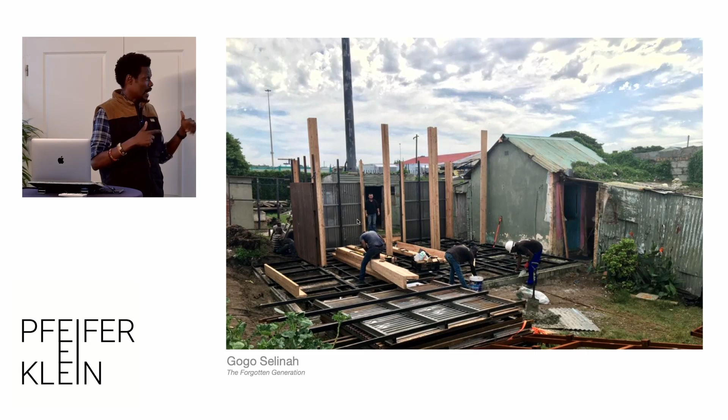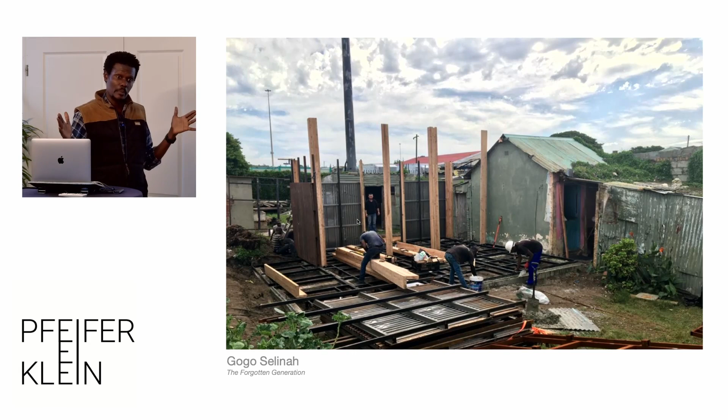But what we did is we recycled those. We took all the wooden members within them and created new beams and columns. So we laminated them, which is what you're seeing there. Then we took the skin of the collapsible shipping container and used it on the outside. We also took the OSB boards and used them on the inside.

Freight containers usually have foam inside them to control the cooling. Port Elizabeth is an industrial city, so it has a lot of these freight vehicles transporting fruit, food and all that. So we took that foam, cut it up, and insulated this house.

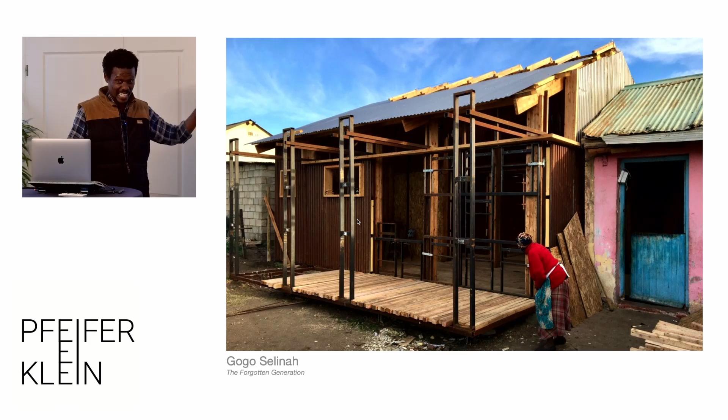So this is us working. By the way, this was during COVID, in the middle of COVID, so we only allowed 5 people maximum on site. We had to create the building, prefabricate it, and then bring it to site, making sure that the old lady didn't get COVID. So it was just madness.

And this is one of those nights we just pushed the project. We wanted to get the project completed. So what we did is we restored the old structure. Actually, let me play a video of it just to show you what it looks like.

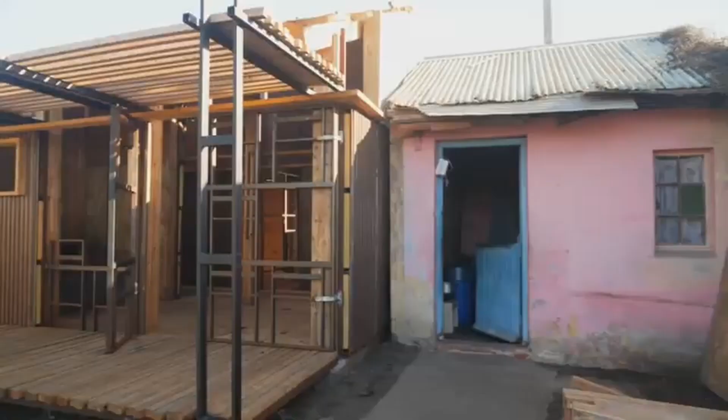So here we are at Selinah's site. On my left, you see the old house. This is where she's lived her entire life, basically. She moved here around the 50s or 60s. And behind me is the new structure that we're building now.

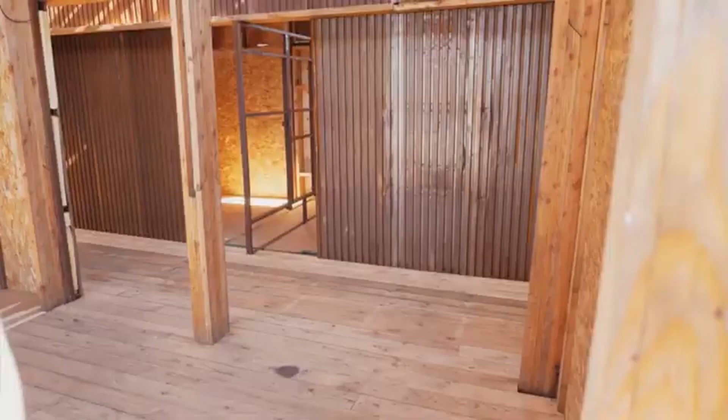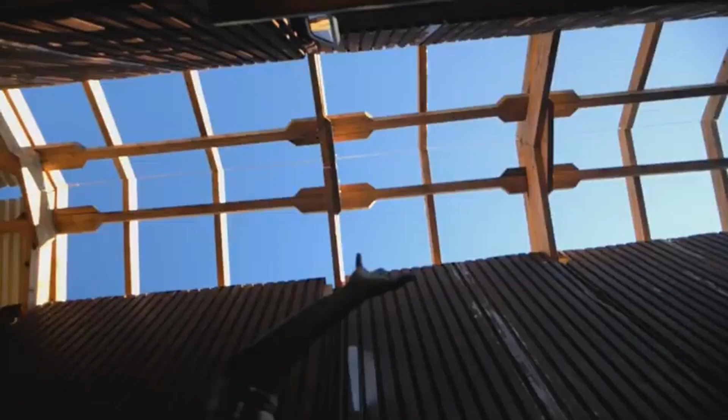So this here is actually the dining area, with a bit of a kitchen on this side, and then looking out, the balcony and veranda. A very interesting feature of this house is the atrium, because the design is meant to be passive, using natural lighting and very little energy. The carbon footprint is meant to be as small as possible.

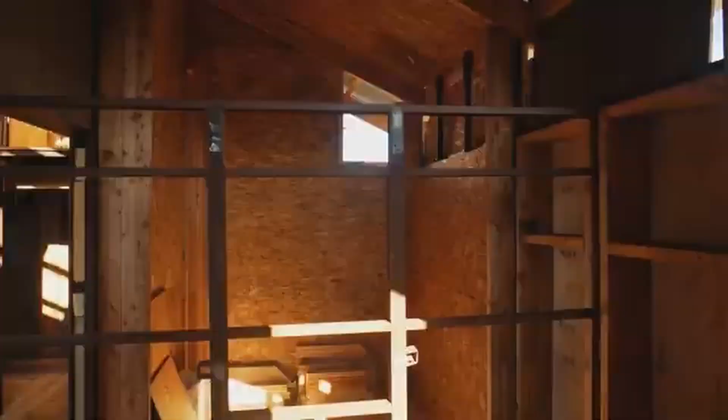We're going to cut a big door here into the existing structure so that you can move from the lounge through the corridor into the living area, into the kitchen on that side. And then these here are the 2 bedrooms for Selinah and the granddaughter.

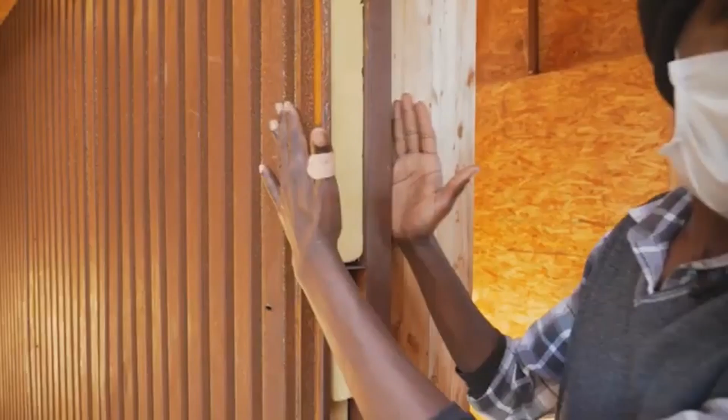So this is one of the secrets of this house: it is very well insulated. You can see the thermal insulation held in between the sheets and wood. So this area is very special.

It's actually Selina's granddaughter's study area, elevated high up, a bit of a quiet space. Underneath it is where the bathroom, shower, and wash basin will be. There's a nice big window on that section.

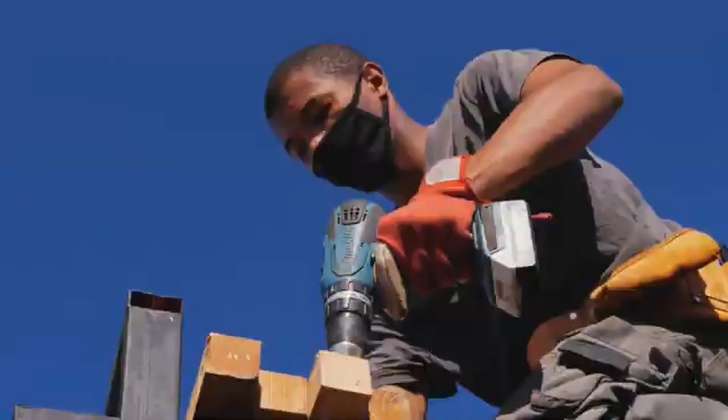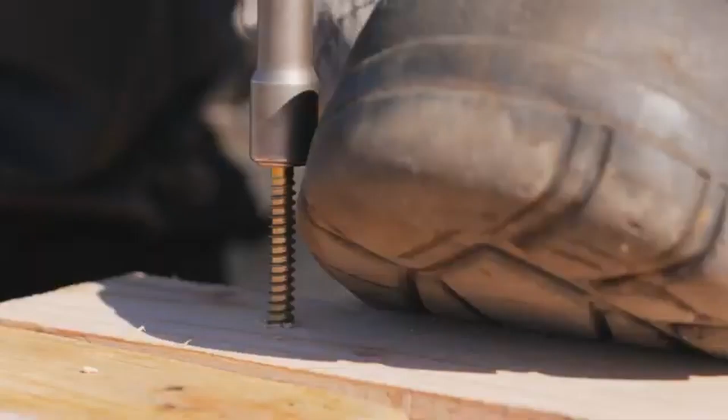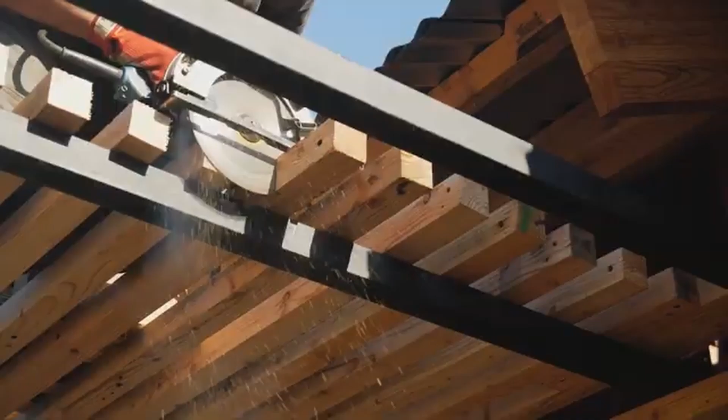It took Kevin and Sitlibo 4 months to build the new house and then another 12 months to complete the inspirational project. What you're seeing behind is finally a result of all the effort that many people have put into creating it.

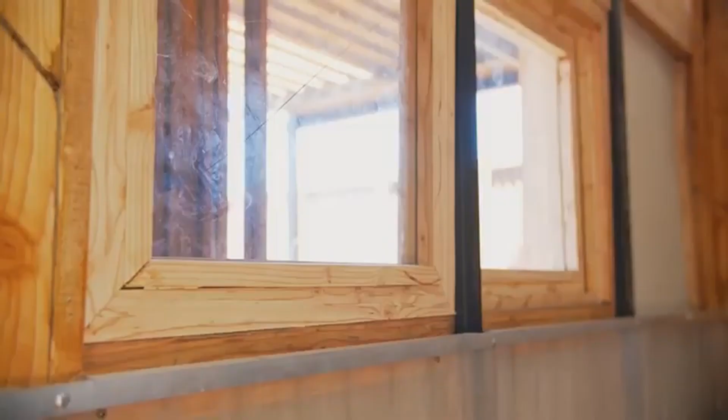So this is the dining area of the house. As you can see, it opens up to the north, and behind me is the kitchen, which is actually quite simple, made up of chipboard and recycled wood. It's an open plan layout, simply because that's what we could afford.

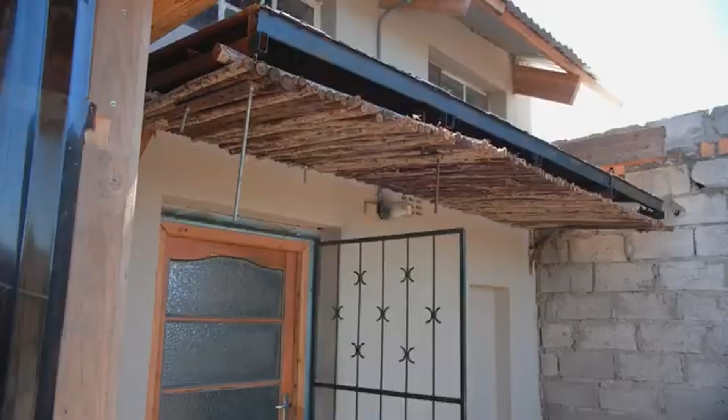Then we come to the living room. The lounge is actually the original part of this house. This is where the ceiling was collapsing, and what we did here is raise the house higher so there was a double volume, which means the house is much cooler. We retained the fireplace behind me. The couch you're seeing here is also made out of cassettes, which is very interesting because it's quite comfortable, 3 chairs to make a sofa, also from recycled material.

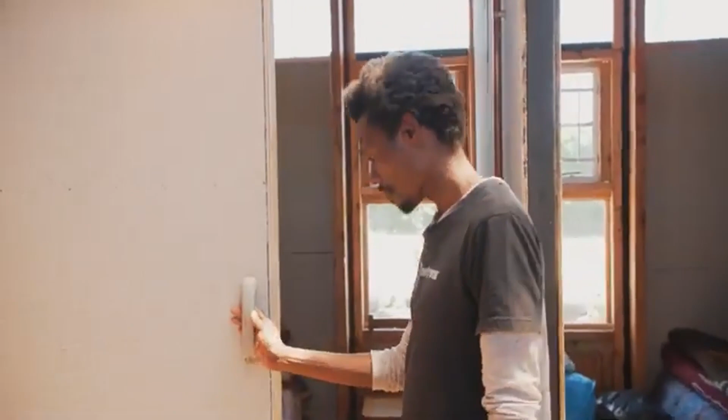This is Gogo Selina's bedroom, and this is Michelle's bedroom. The two bedrooms are actually identical. They consist of a single bed and a whole wardrobe section, which is also made up of recycled material from metal and wood.

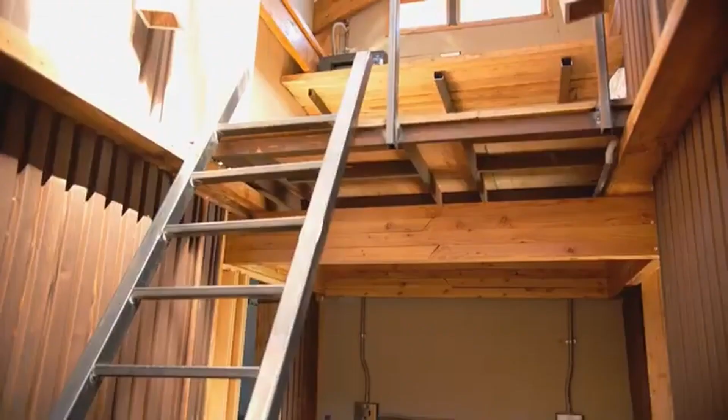Behind me is Michelle's study area. It's a special space. You have to go up through a cat ladder, and on top is a small space which provides maximum privacy and good space, just mentally, for Michelle to be able to concentrate on her studies.

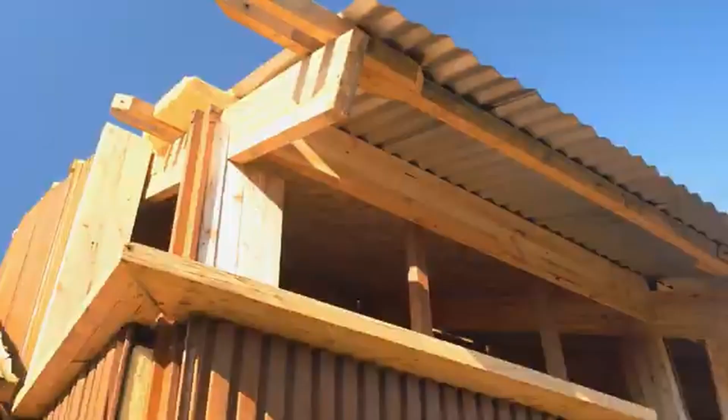Michelle is an amazing young woman who's currently in matric and has a great love for theatre. She has been able to grow up fast and is a protector for her grandmother.

I love my study room, and I love the fact that it is upstairs, so I would see Gogo when she's calling me, and I would hear her and run downstairs to help her.

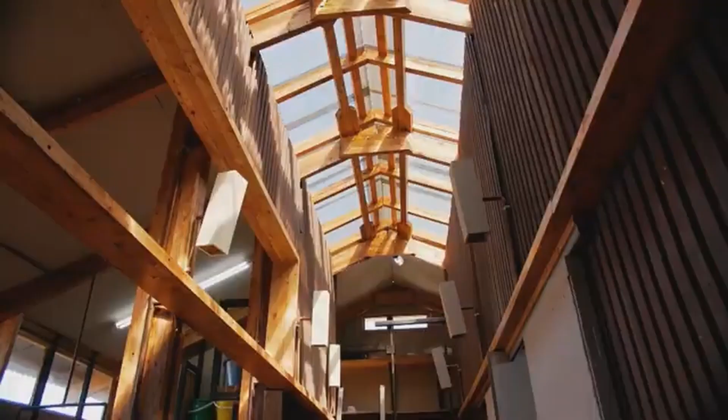Wanting to ensure Gogo Selina's prosperity, Kevin established a vegetable garden with help from donations. He was inspired by noticing that Selina had green fingers and had already planted flowers to beautify her garden.

The back is very interesting. The floor is made up of recycled bottles, beer bottles, wine bottles, any kind of bottles, and a garden which Gogo Selina can now maintain with the help of Michelle.

So there are peach trees, there's spring onion, there's spinach, there's beetroot. The idea is just to make Gogo Selina a little bit more self-resilient by growing her own food and being able to eat from her garden.

There is also a future plan to install rainwater tanks for a more sustainable source of water.

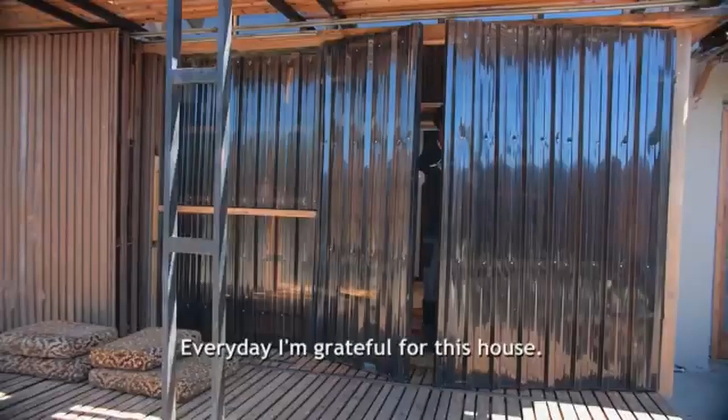I just want to thank everyone who took part in building this house. Wow, it has reached more than what I expected. It is so beautiful, no words can describe how I feel.

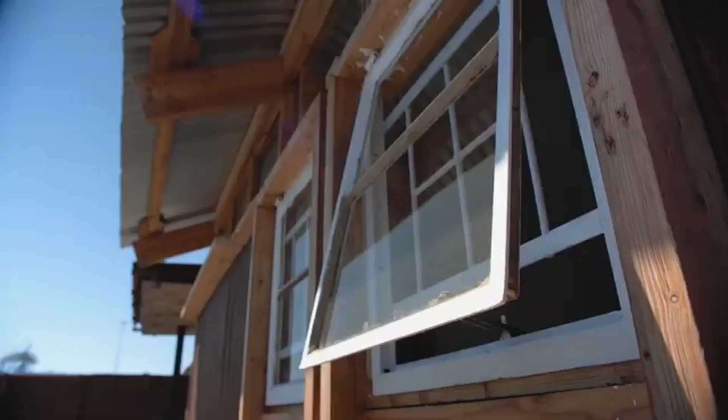So Gogo Selina represents an old generation of South Africans who have kind of been forgotten. Really seeing this dream come true, it's mind-blowing, and it's a new home.

It was really inspiring for us because right now Michelle is actually doing her BTech in electrical and IT. So she's grown up to fulfill the promise that we thought we could create in her life by being able to go to university.

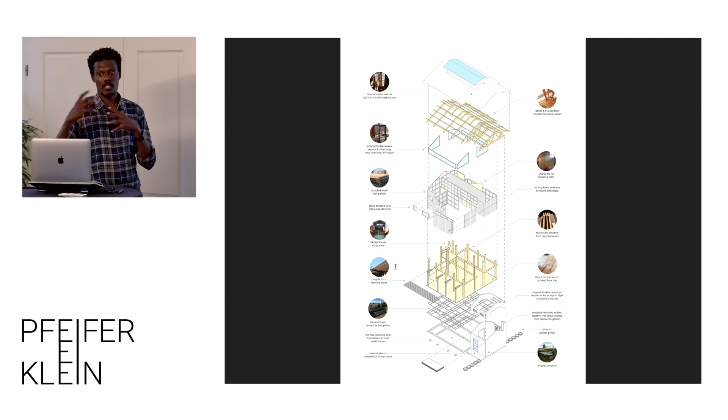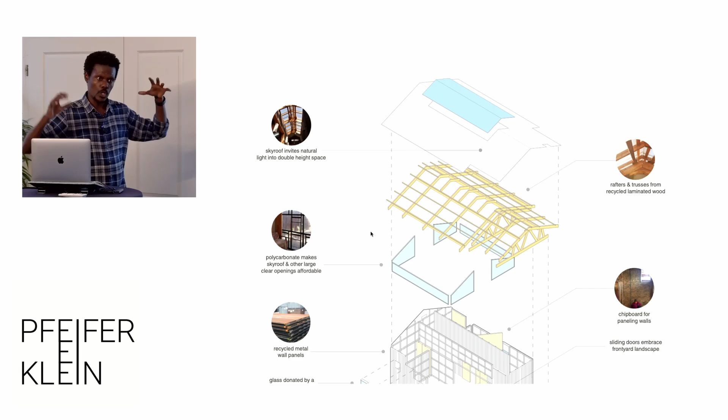This is a bit of an anatomy of the design, us being mostly architects. As you can see, the roof sheet is new, light comes through the middle of the house, and then you can see the three layers.

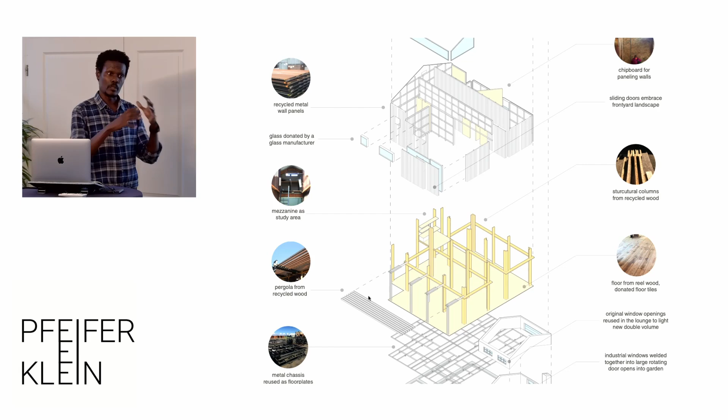The structural component is actually laminated wood that we laminated ourselves from dismantling these shipping containers, but we knew that they would be vulnerable to water. There is the old structure, original structure that we restored, so from an architecture point, from a heritage point, and then extending that into a new structure.

Let me just talk about it. So we have done conventional buildings. This was for Masifunde, one of those projects we tried really hard to convince the client to go recycling, and there was a bit of hesitation from a funder point of view, both from various aspects.

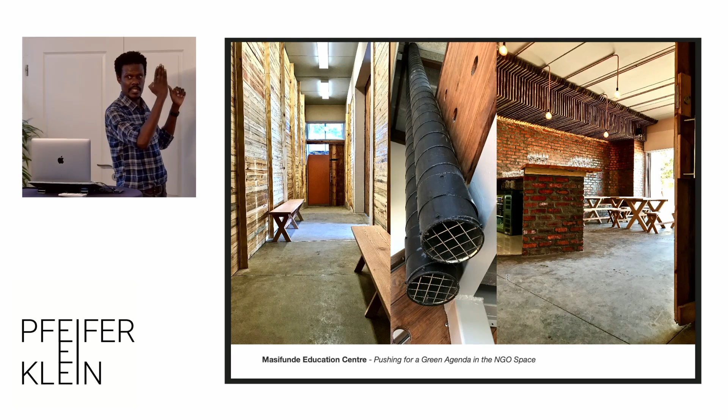What we did there is we retained the internal walls by using collapsible shipping containers, by using pallets. These walls can actually move, so they are studded walls, and this bottom area can be, if they need it, one room.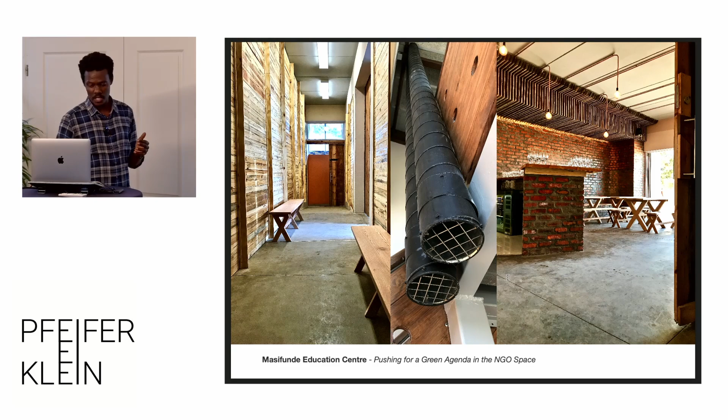And then the bricks, we pushed the contractor here to recycle as much brick as possible.

I'll jump to another project, my last project for today. So we've moved from a waste picker to a community to a house, and I say a house is very difficult to do from recycled material because it's very personal. It has to work 100%, and usually that's where the barrier is.

We were able to create for the waterfront in Cape Town a recycled structure. We were very surprised that we could be called in to build such a structure on Africa's most expensive land per square meter, the V&A Waterfront. So already it tells a story of challenging the status quo, because many times people think recycled material is for a certain group of people. But we were able to turn that upside down.

Our challenge here was, all right, we're going to do the structure, but how do we take that even further? What we did is we decided to create the building from 98% recycled material. For us to do that, we'd have to find every single material from various sites within this precinct.

With the collaboration of the client, over 3 years to build this small structure, we collected and demolished—we went to every demolition site within that precinct and pulled out as much as we could. These are buildings that are going down very quickly, and we had to deal with demolishers, contractors, etc. We were able to pull as much as we could from all the recycling facilities within this precinct.

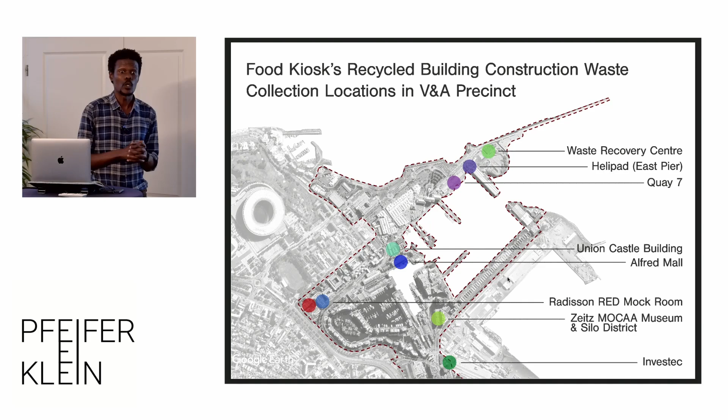Because the bar was set so high, the negotiations with the city took a while. I think we submitted this building thrice, negotiating with the city and the municipality, trying to see how we could create this structure out of recycled material.

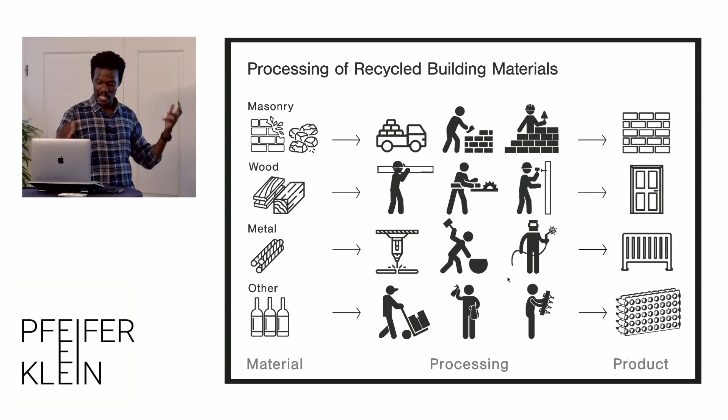We then had to do almost basic training for everybody—the client, the contractors, ourselves—on how we were tackling this material. This is a bit of the processing, explaining to people very simple things like what is going where and why, and what is coming from where.

We knew all our roof sheets were coming from those 3 sites, our RC bars from that side, and the wine bottles, bricks, etc. from elsewhere. We had different demolition sites to harvest different materials. The trick was to ensure that as the building came down, we salvaged and cleaned it, getting rid of things we didn't need as early as possible, so we could bring them to a site where we sorted everything into a library.

This is roughly the inventory that we created—about 1,017 pieces of wood, paving, roof sheets, 174 pieces, very basic. This is meant to be foolproof so anyone can understand what we're doing and why, because as architects we forget that the man in the street doesn't necessarily understand our language, our symbols and everything. So I really tried to make it as basic as possible.

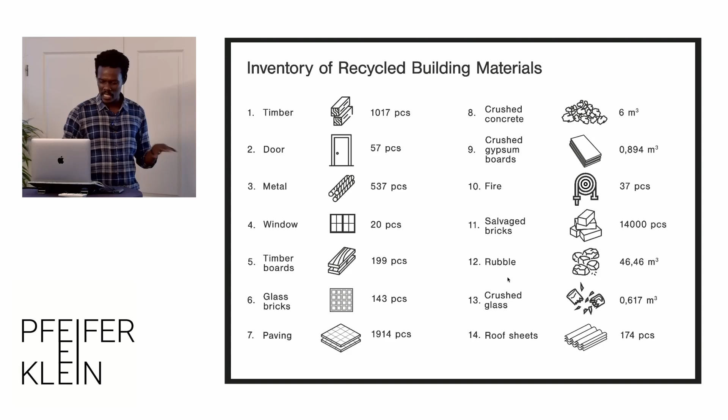This is a bit of the energy or carbon footprint tracking. You can see we are tracking all the vehicles—there was a vehicle on the 20th of April, a small truck, with the model of the engine and the number plate; it's a diesel engine. It came from a salvaging yard 18 kilometers away, carrying 12 beams, in used condition.

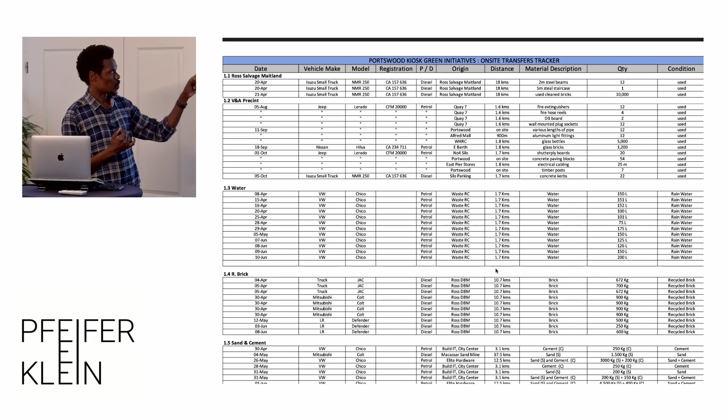Essentially, we are tracking everything—material, water, brick, sand, cement. I won't bore you with all of it, but the idea is we followed everything from where it was coming and where it was going to the building, because that's where the carbon capture is. Then we got into the exercise of educating the people we worked with, including my own team, the client, and the community around us, on what we were doing, because they kept looking at this material. This is a very expensive site, but to a layman, they're just seeing a heap of rubbish.

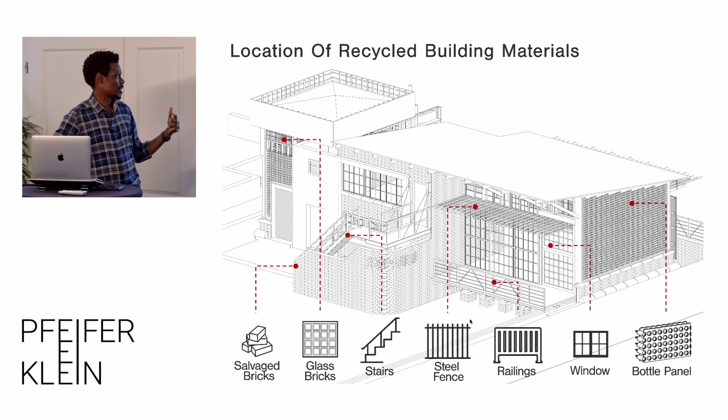And they're asking themselves, why are you putting this rubbish in the middle of such a precious site? Anyway, so we were trying to explain to them, actually the steel fence is going to be part of the pergola. The glass bricks will go over there, the salvage bricks, etc. So this is a bit of the communique that we were giving to everybody, including where the collapsible shipping containers would be, and then eventually a bit of the renders.

The other thing we did at this project is there is a food garden. Just remember, this is a food pavilion, a food kiosk, a simple cafeteria, a daytime cafeteria, because it's in a corporate area. The idea is that the spices and vegetables are grown right next to the site, and then that goes into the cafeteria. Of course, that would not be able to supply all the food they needed, but it's a bit of a surplus, and it's the gesture. Again, just imagine this as a pilot project, speaking to a bigger possibility within the precinct and us carrying through the concept. So we were able to finally bring in food.

So you had me talking about energy, water, electricity, and now food comes into the picture. Food is grown here, especially spices, very simple spices and day-to-day things, and then they go into the cafeteria. That's what the render of what we imagined after collecting all the materials was like. So that's a bit of the entrance.

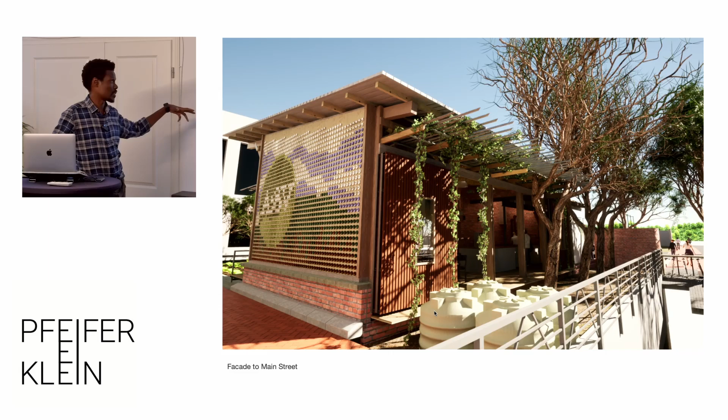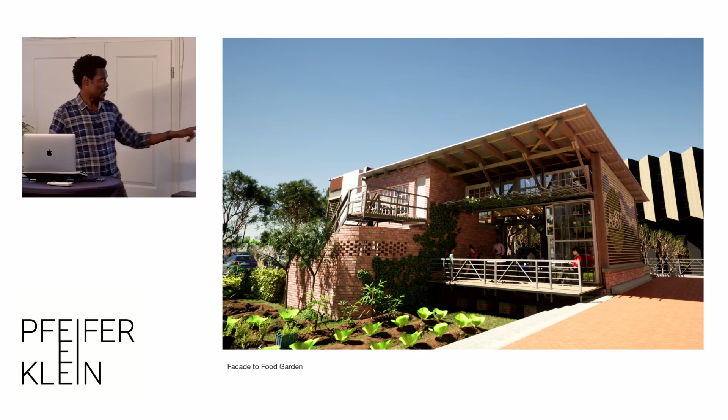Obviously, collecting rainwater, because we wanted to capture the rainwater and use it on the garden. This is a bit of the entrance. So all the wood, taking all the elements and trying to connect them and see how much we could use in the structure. This here, once upon a time, was actually a gate that was thrown out, and we were able to remodel it and build it in.

And you can see the other thing we've done is we've taken all the lessons learned from all the other work. We were not shy about it. So the paper tubes, which were originally a wall, we were able to create a ceiling because we were bringing in light, but it was harsh. So we wanted to filter it, and we used the tubes to actually filter it.

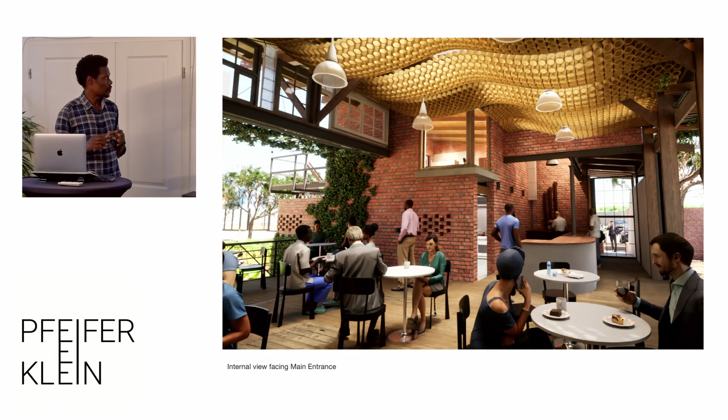All the bricks in this building are recycled. The concrete in this building is recycled for one of the sections. And the windows are all recycled. Let me go to this. So all of it has been brought in. Even the light fittings are recycled.

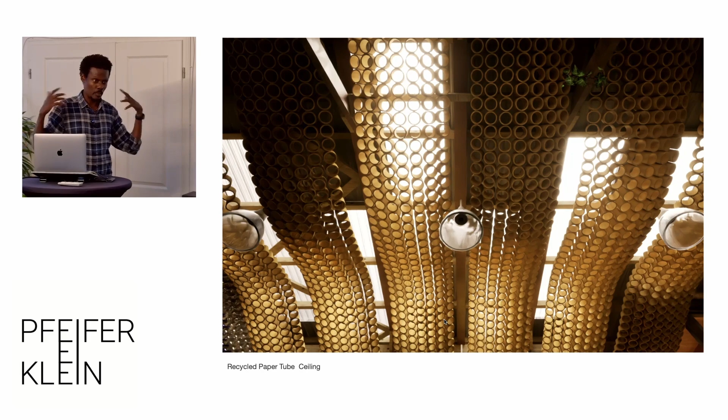So we pull these light fittings, and they're quite old. They're quite popular - I see them also here in Germany. They're like a 60s, 70s kind of light fitting. It's very heavy, but many times people don't want to reuse them, thinking it's a big mission. But all you need to do is actually change the fitting inside, and then the light is beautiful. So we were able to reuse these.

This is a bit of the process. You can see how the concrete comes in, and we were able to crush it to that. And we were able to use crushed glass again. These here, what you're looking at, are 3 different concretes with different strengths, all the way from about 14. In this structure, we needed about 32. And we were trying to see which one we need where.

So for the kitchen, for example, and such areas, we needed to make sure that, because it's an industrial kitchen, it meets structural purposes. But there was a lighter one, if you look at it here - this is for finishes, so that the glass can come out, you can polish it, etc.

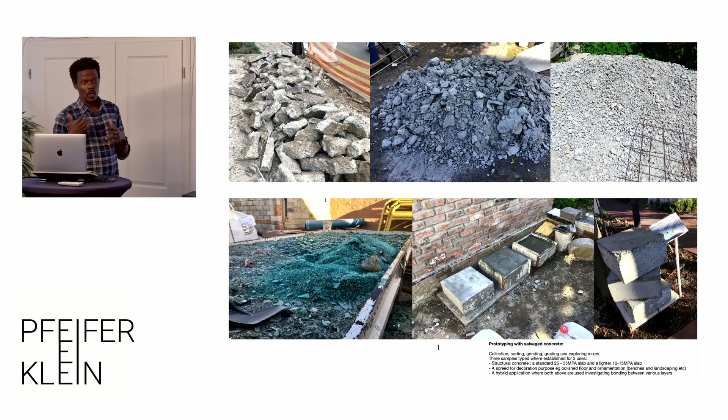We also looked at gypsum. Gypsum is a big problem. It's actually one of the bulk materials that comes out of construction sites besides bricks and concrete, because all our structures use drywalling. And when this stuff comes out, it's just thrown away - it's very hard to recycle because the cement is dead. What we did there is we took the gypsum boards, soaked them, took out the paper, created a paste out of it, and created 3 different possible uses of it as a plaster. So instead of it going into landfill - because nothing grows where gypsum board is put, you can forget about that site - it just blocks everything because of the dead cement in it.

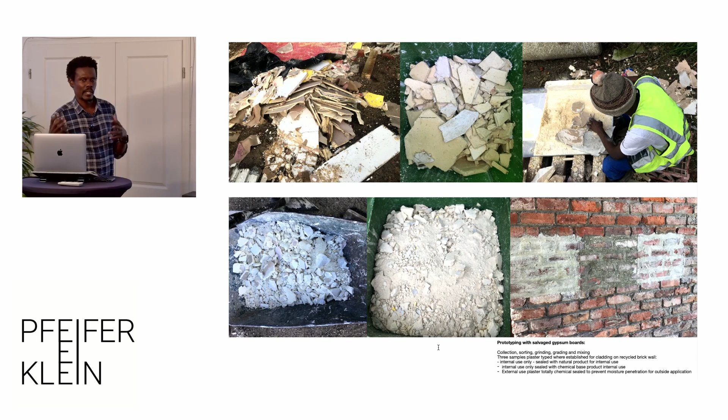Anyway, so that's kind of what I've been doing in South Africa. And the city of Port Elizabeth was asked at a national level - actually all the cities of South Africa were asked to put forward their best practice.

The city of Port Elizabeth decided to put forward the story of our work, which was very surprising because usually this space is taken by large municipal projects with a certain scale and budget. But they chose to give this story, and I think I know why, because it was very inclusive.

So you can see that's me there, they drew me there. I went to the township. I don't know if I mentioned it in my introduction, I'm actually an academic, a professional associate, but I'm also a practicing architect, so I use both feet to create a social economic impact.

So I went to the university - this is where the R&D comes in. I get students on board, and we decide we need to solve how to use this material. You can get 30 young students with big capacity for exploration, and they solve it while you deal with boardroom meetings with the municipality and community and all the stakeholders who have different egos. So you give that opportunity to the university and students to do what they can do, then you pull that R&D and bring it back to the community.

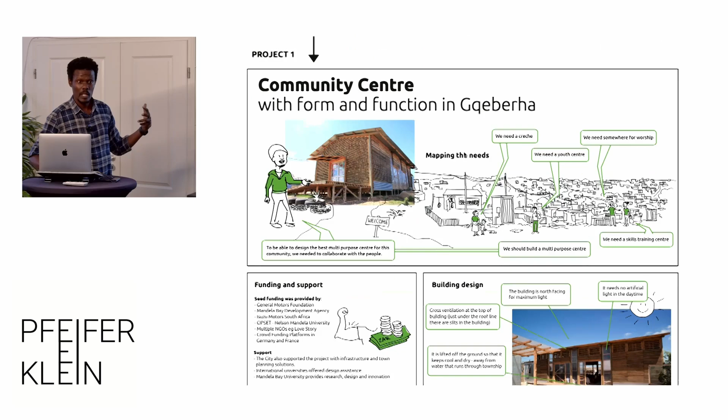So just going through those processes, that very inclusive process essentially, being able to bring everybody and rally everybody around - this is the cartoon that the city decided to use for all the work that we do. Again, I say we because it's very many people involved here - NGOs, municipalities, universities, everybody.

I'll stop here because the accolades that we have attained - we've been able to attain quite a number of key accolades. The Design Indaba, most beautiful object, as a finalist, was quite a big shock to everybody, including myself, because people suddenly realized that you can do beautiful work with recycled material.

But the SAPOA 2018 was another award which was very interesting because it's done by property owners, and it's a very coveted award. In this case, we won it because we talked about inclusivity. Usually the people who talk about property are property owners, right? In this case, we were presenting our community as a property owner, and them just being able to see that and realize what this project was about.

And this was best overall transformational project in South Africa 2018. You can imagine we're competing with the who's who in South Africa for this one. Obviously we've won a couple of awards from regional to national.

I think why I'm telling you this is because they validate and they kind of show other architects that it's worth it. It validates the use of the material, it validates the approach of architecture - that it's actually worth investing and putting your entire practice and team into it, because it's really annoying work at times, counting all those bottles and everything, and you have to take a whole team through it. So just the reward of it.

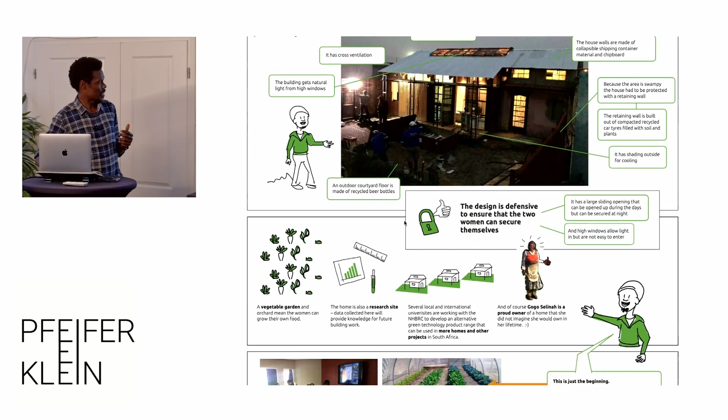And here you can see the story of Kusta Moko and eventually to Gogo Selinah's house, which is over there. We've worked with other communities - I spoke about the community center there.

And for the university - this is the academic side - really repositioning transformative education, looking at education as a tool to create social economic impact, or shifting research to move closer to humanities. A lot of times our research in academic institutions is based on the funder, and the funder could be anything from the motor car industry to a construction company to materials like concrete, brick, etc. Just go look at PhD research and you'll see what comes out of it. So think about it and start shifting it towards humanities, especially in Africa, where we have such large poverty and such a young population that is doing nothing in terms of being unemployed.

So really looking at a kind of architecture that is able to include others, give them the opportunity to have a livelihood, to have a skill, to create a living for themselves is really, really important. And I think convincing the architecture schools to get involved—I spoke to TEDx, and this particular TEDx was about innovations in communities and solutions, and because of the work, I found myself suddenly speaking to the green industry.

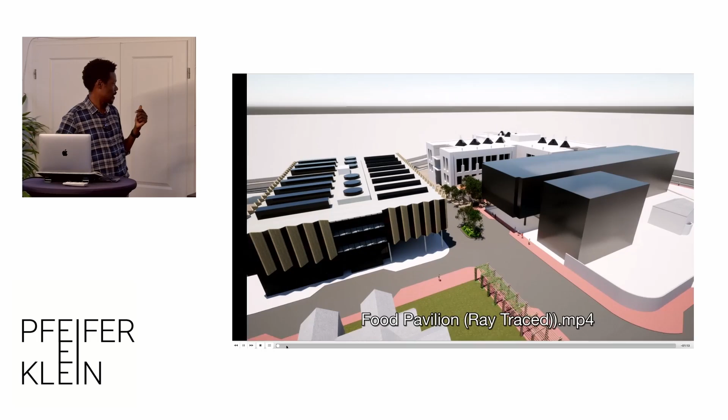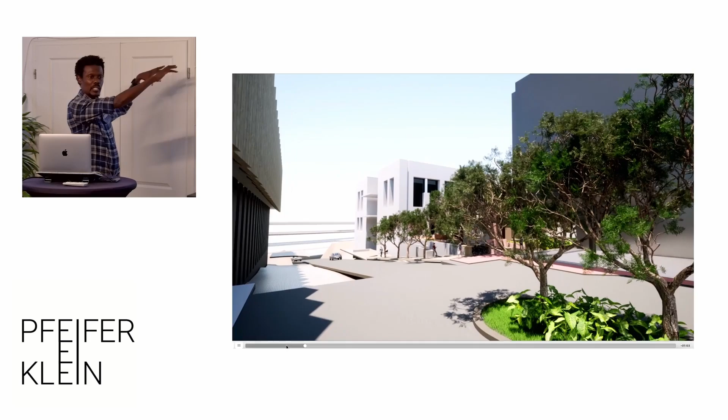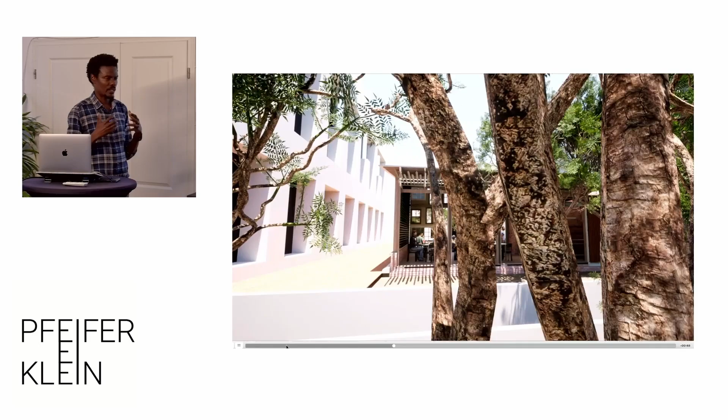I'm going to very quickly go to the video here and show you that last building, just so you see what it looks like. Because we are architects, I thought let me just show you a bit of a render—so that was the idea. You can see the building is surrounded in a corporate space, and in that corporate space, in a small garden, we were able to design this garden in a way that spoke to the surrounding buildings. So it's a very low-key building, and maybe that's all it needed to be—a simple structure, very low-key, very functionalistic in nature, but very practical.

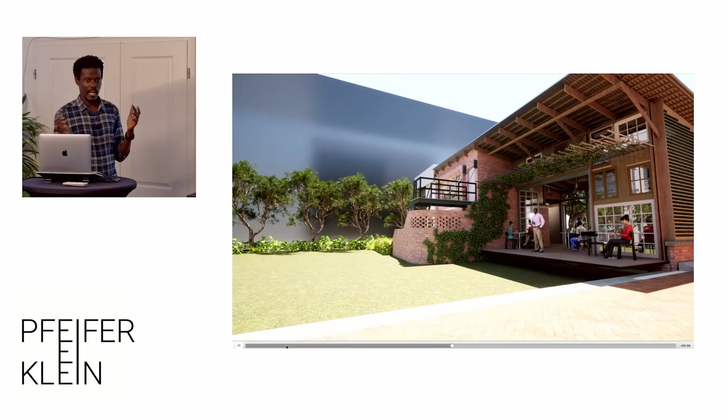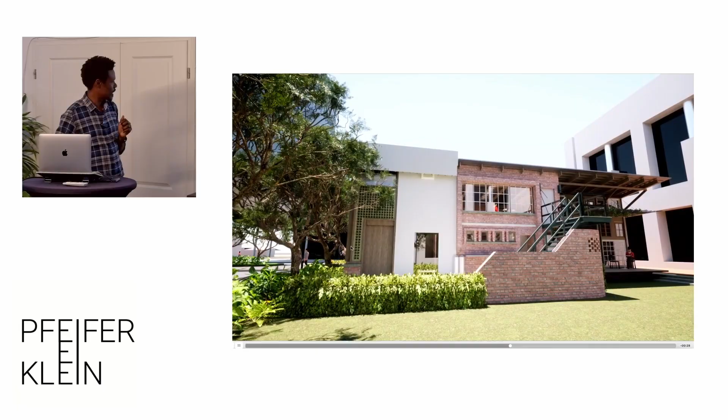As I said, we pulled out all the tricks we had learned. We were not shy about it, and we put them into this project. You can see the materiality of the building, everything from the beams, the columns, the brick, the steel staircase. Yes, we found three steel staircases and had to choose one. And once you chose it, we had to use it because we can't take it back—once it arrives on site, it's there.

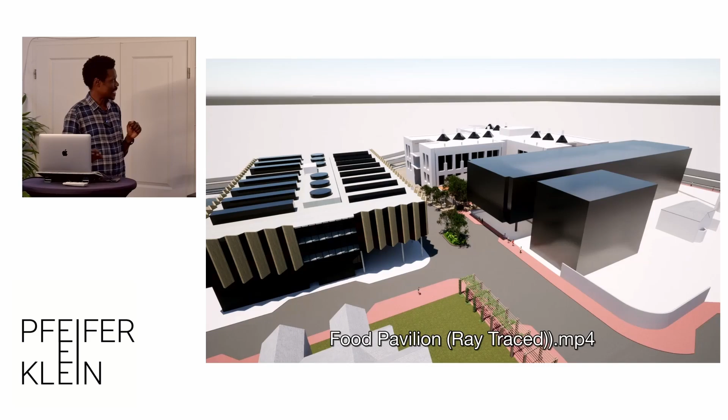So being able to really modify—and you can imagine just getting this done. This is a lot of people, students actually, helping with this. And this is why I think architecture in terms of practice and academia really comes into place, because young people are suddenly able to engage in industry in a very real project.

I'm going to play the next one. Let me just see if it will come on. Give me a second. Just see something here.

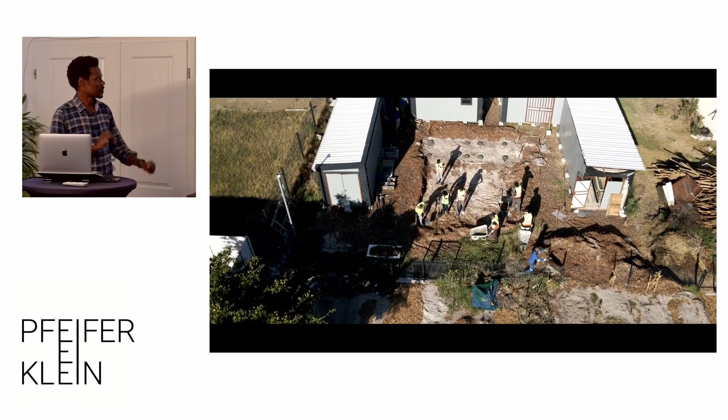So we were working in this middle section there. Yeah, also making them push wheelbarrows.

You can see bits and pieces of metal, all of it together. All that wood that was left over, these are roof battens. We took them through the process of cleaning it so that they know what it takes.

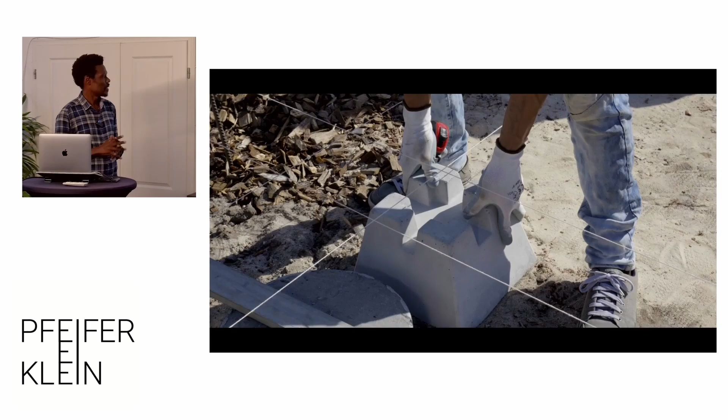It's a temporary structure. That's why it's built like this, with the idea that when the community is done and they need more space, this thing can actually be moved elsewhere.

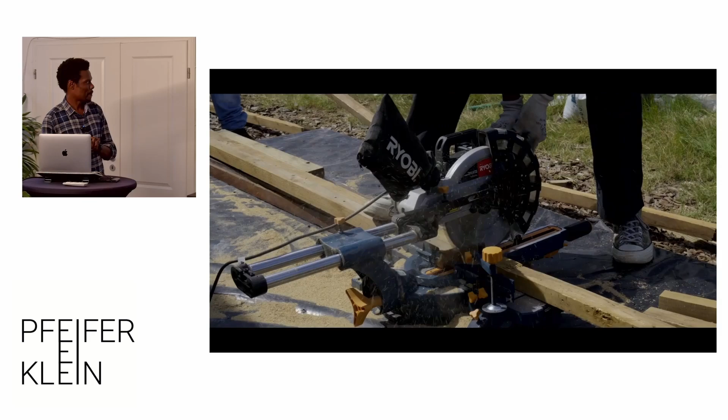And they were very eager, very excited. They owned the project, calculating everything, buying the materials, which was really, really great.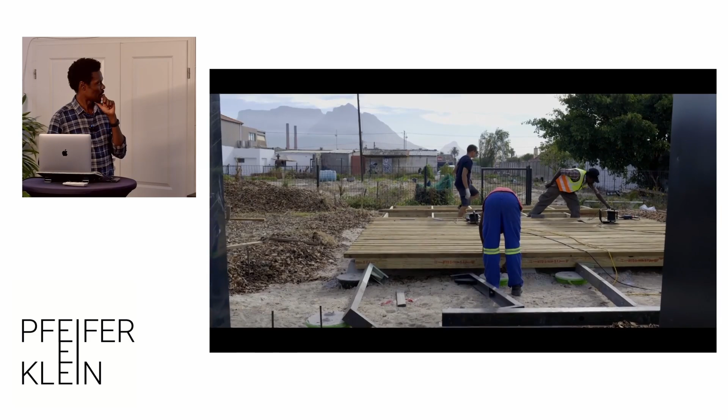So it's a small structure. It has a kitchen, a sink, a microwave, a small laundry machine. The idea is that when the farmers are working, producing food, they can have a place for meeting, their own meetings.

So they're able to come together in a space and use it in their day-to-day activity. Because what we realize with farming is you start in the morning, and you had better be committed to almost 6 hours minimum to be very effective. That's a lot of time that they spend there.

Without a facility—and that was the design challenge for the students—a space that is usable in different ways, that creates a gathering space where farmers can come with food, warm it, wash dishes, have meetings, etc.

And with that, I think I've come to the end of my presentation. That's what I do. I'm very lucky to have the opportunity to present here in Germany, to give you a taste of what we are thinking and doing in Africa.

And also being able to see what's happening in Germany and realizing we're actually doing the same thing. The challenge is the same. Concrete is a material that is everywhere—it's no longer a material that belongs to one part of the world.